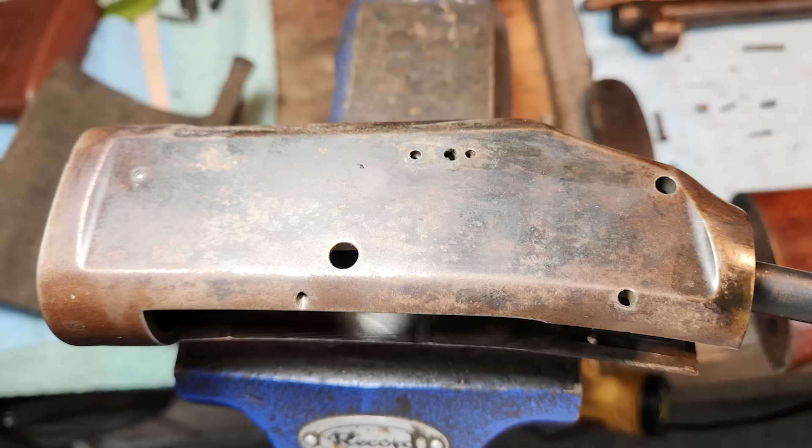This is an 1897 Winchester. Why do I have it? Because it came into a local gun shop with a Class Alpha safety problem, which is that when you closed the slide, the hammer would drop. Well, the problem with this particular gun is it's supposed to do that. So if you've got your finger on the trigger and you close this slide, that hammer's going to drop.

So now here we are. The customer honestly believes the gun's broken, so therefore I have to believe the gun's broken. Beginning gunsmiths don't get into a confirmation bias, thinking the customer must be screwed up. The customer might have to be trained, but the problem is we got to go through every single nut and bolt on this gun and make damn sure that there's nothing loose, broken, or anything that could cause the hammer to fall in a normal stroking operation.

This is a rabbit hole, so we're going to tear a 97 all the way down to zero and start over. Shall we? Let's go.

Step one, obviously, is going to make sure there's nothing in the back end here. This chamber's a little bit dirty, so we'll have to clean it. The gun's just coming all the way apart. It is a takedown gun.

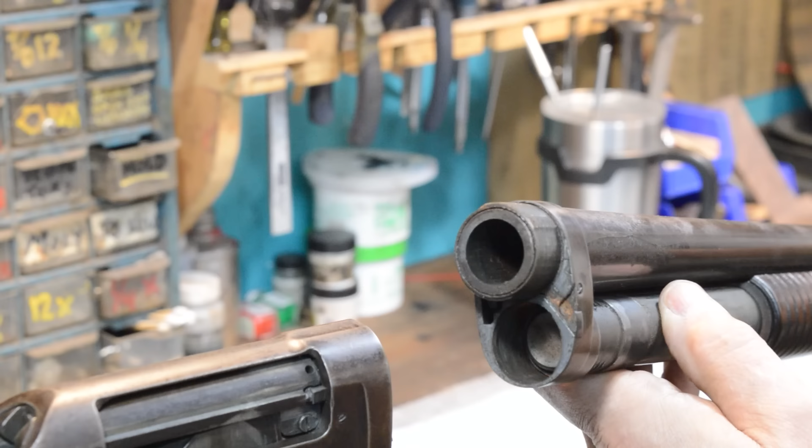Now, it is nasty. This thing is nasty, and it hadn't been apart in a long time. So we're back to our avoiding confirmation bias. We're just going to assume that if we run all of the problems down with this gun, the problem might show its ugly head.

There is a way, I believe, on this gun to slide this back, and when that slides back, this sleeve can rotate and we can take that little bit of slop out. So holding the same camera angle here, we're going to take a look up inside, and we'll see on closer inspection that there's rust up inside there. There's a lot of dirt. It's been a long time since this thing's been apart.

Okay, it's got all kinds of patina all over it, and all of this is dried oil. So I'm wondering if all of these nice features down here on a stock isn't just stock lubricant that has been flowing to the bottom of whatever gun cabinet this thing is in. So now we suspect wood integrity.

There's a lot of stuff going on here, and we're going to dive in a little bit further and take a look at what that looks like. So part of what I'm doing here is we're going to knock this thing down into smaller and smaller pieces. So there's a lot of dirt up inside this screw head. We're just going to dynamite some of this dirt out of this screw head.

Tapping all this stuff out of the holes so that we can go in and run these screws out, right? We'll have to go back in and cut these slots because this screw head is barely going down in here, but we'll get it, because when we're all done, we will have fire blued all of these screws.

Okay, good. That didn't fight us too bad, but this thing's been in the water, I'll tell you that. They're nasty, all right. The back of this is adequate, not so bad as I've ever seen it. But you can see all this oil. There's oil everywhere. Wow.

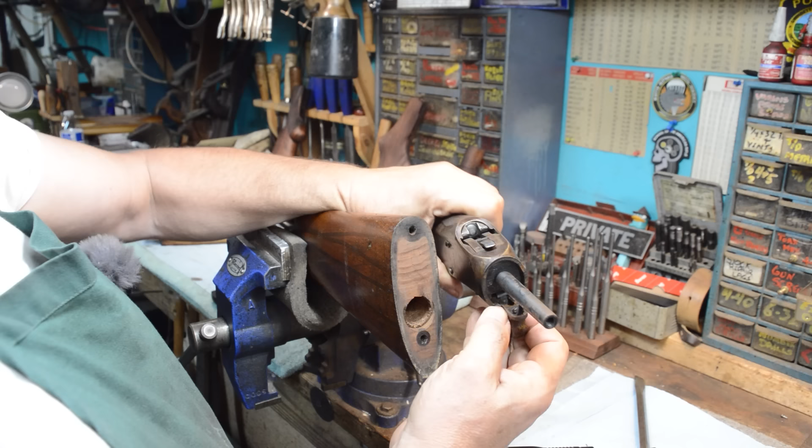We're pretty clean back here, not a lot of rust, but there is rust inside the gun. So what does rust and dried-on, impacted oil tell me, in a non-confirmation-bias environment? Until we get this thing clean and reassembled, we really don't know what we have. We don't know if something got rounded over. We don't know what we got. We'll continue to proceed on that basis.

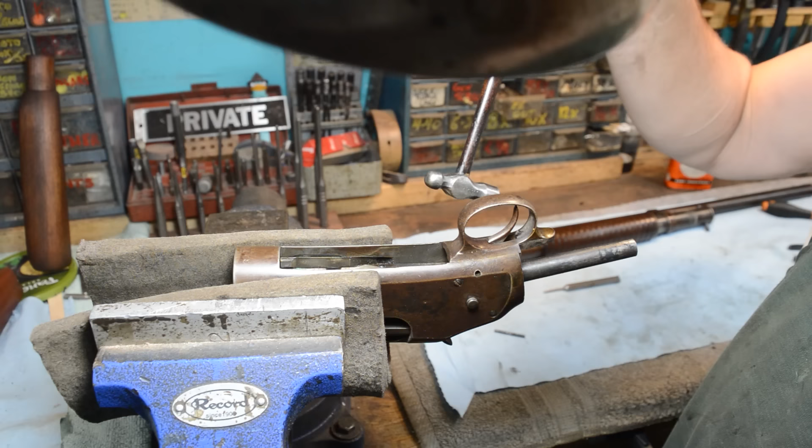That pin out, and then let's see here, we're not cocked, so I should be able to just lightly massage this to the rear. There it goes. In case you're wondering, I'm not hitting this very hard, I'm just love tapping it. In fact, if it makes anybody feel better, I'll come in with a plastic hammer if it makes them feel better.

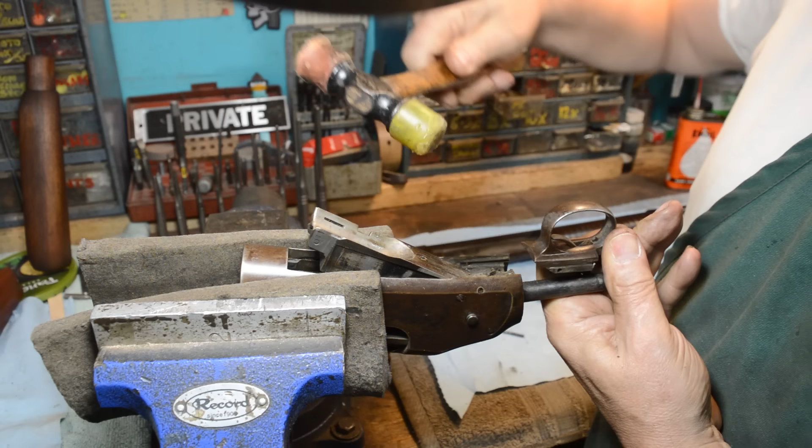Okay, so we got a little bit of dirt in there. In fact, I'm not entirely positive there's not a dead animal in there.

What you got to watch is that you don't break the end of this sear off, because that is the sear. You can see that moving, and when you press down on that, the hammer comes down. So you don't want to load that too hard, and it just slides off the top.

Contrary to popular belief, there is a locking screw right here, that when you back this locking screw off—and I'm going to take it all the way out because I got a feeling I know what the end of this head looks like.

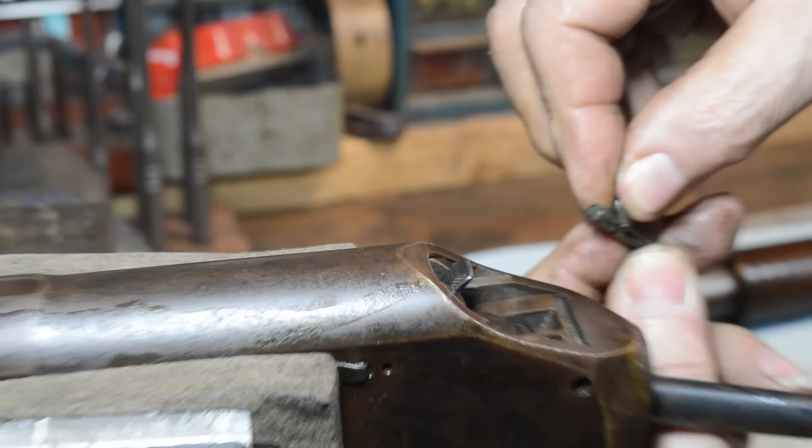See, there's a notch in that, and that's supposed to roll into the notch in the pin—I'm sorry, the retaining pin. Here, I'll show you. So we'll take this pin out, and we'll pick that pin up off the floor. Thank you, sir. And what's supposed to go on is that pin goes in, and then this screw rolls around like that, and it locks it in, you see. And that's what's supposed to happen.

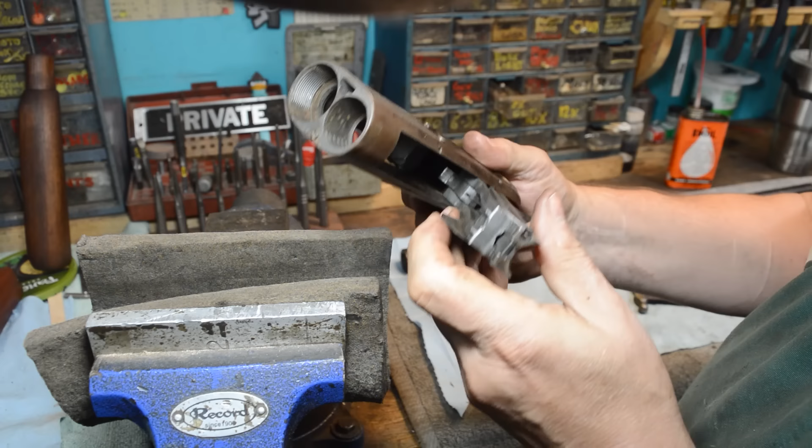And then the bottom of this should just fall out. Okay, you should be able to just get all this apart. This should come by, and that should come out. And what is holding me up? A lot of dirt. Okay, let me make sure now. There we go, I got it.

Okay, so the breech block falls out the bottom, and then the bolt, I think, is retained by a screw. We'll get back to the bolt. So we're looking at the breech block here, and this is where all the fun happens. So that's the sear spring, right? And that's the sear. So when you push up on this, that's what makes the hammer drop. It's also knocking the bolt lock—that piece right there, you can see that opening up and dropping in. So there's a lot of long parts in here with a lot of spring on them, a lot of gack.

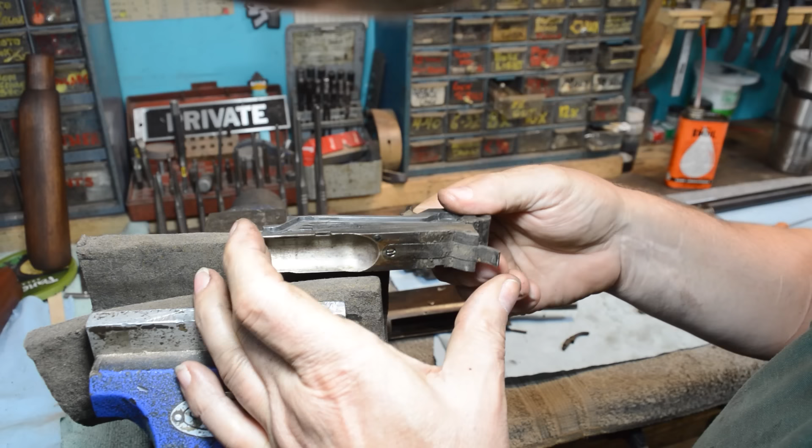Okay, let's keep going, because the mainspring is down inside here. So that piece that's flexing right there is the mainspring of the gun, and it's all in the breech block. So this is where I'm going to spend a lot of time looking, because if this thing is doing something stupid, it's doing it because of what's in here.

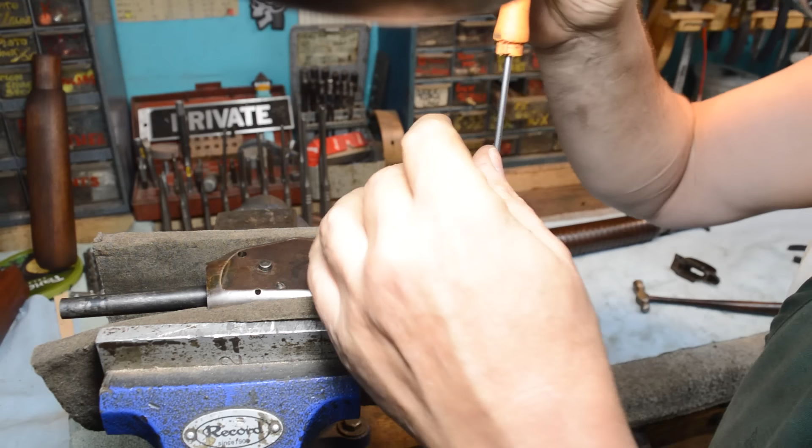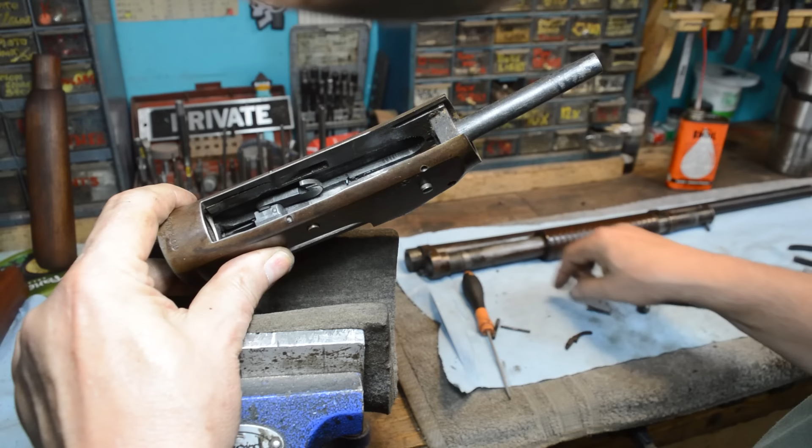Just making sure here. Once this retention screw is out, you got to get that hook out. And the hook has just enough slop in it that it'll roll up, and we should be able to get it out of here. So the hook will come out, and then the bolt should just fall out the back end, unless it's being held up by something.

Here we go, the bolt just comes out the back end. Now the way this thing locks shut, when all of this lines up and this is back at full cock, this part will come up, slide up behind that, and it locks the bolt into the gun up against this trunnion pin. So this is the abutment—that's the locking surface right there.

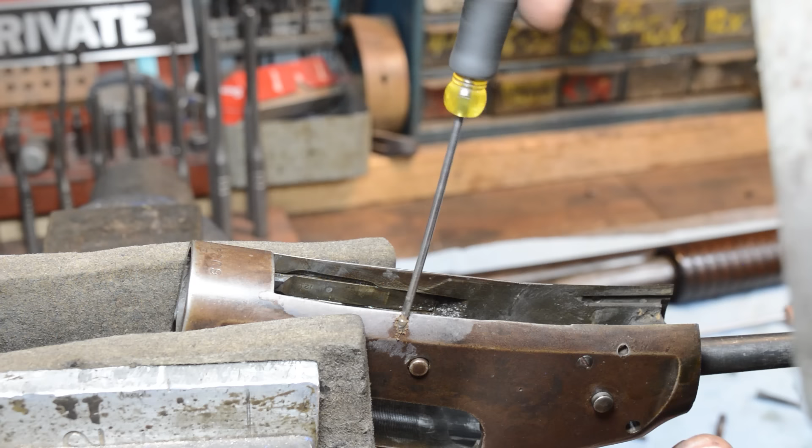There's a lot going on here. You can see all the crap coming up out of this hole. These screws have not been out of this gun in a long time.

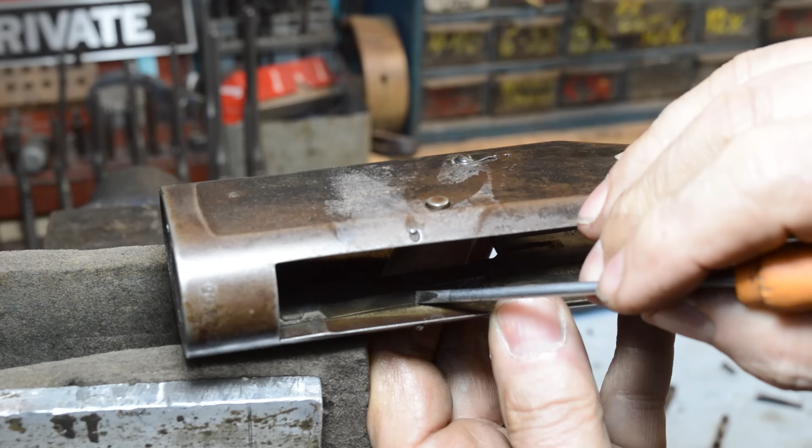Okay, so there's a spring back here behind the shell latch, so we can push in on that. And that's giving me a little bit more, because that screw goes all the way down—it goes through the shell latch and down into the bottom. So that screw's every inch of that long.

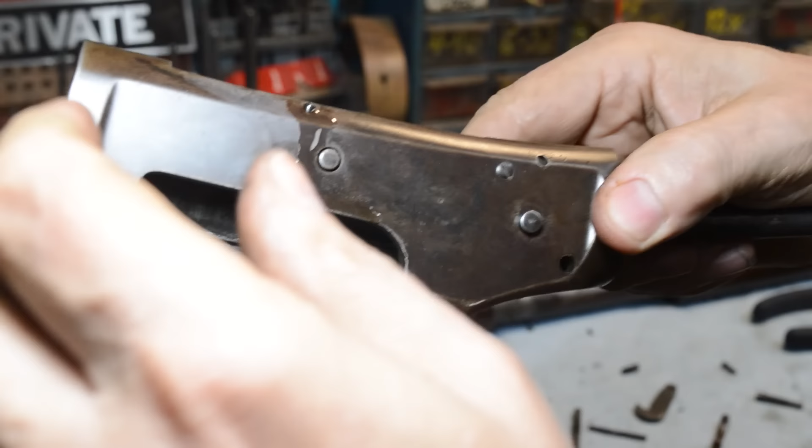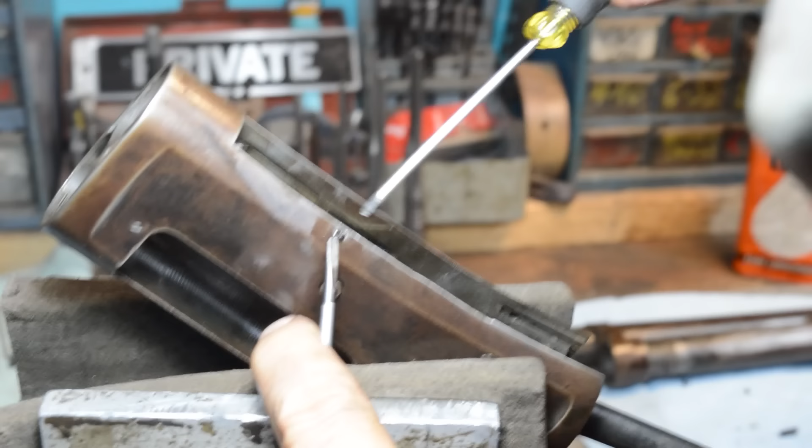So I'm going to drop a little angel piss on it here, and we're going to see if we can't persuade this to come out before we go work on the next one. Okay, we're definitely out of the threads. So I just got to try to get some lift on this and persuade this to come up while I'm rotating it.

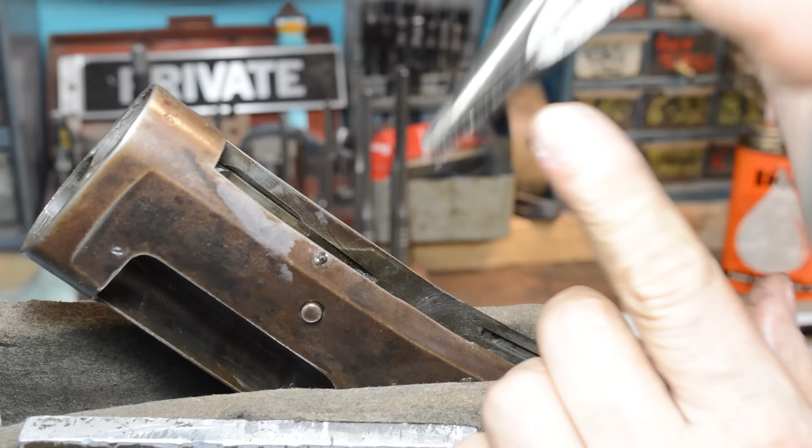There it goes, there it goes. So when I pull this out, we should hear everything cascade into the receiver. Okay, so that little bad boy - gee, we're lucky that didn't rot in there. You can see the threads, you can see everything. And once that goes down, then this shell latch comes out.

And I took them out because they're crunching. There's a lot of garbage in behind them, a lot of garbage up underneath that spring. This thing's pretty nasty.

I got to make sure I keep track of which one's what. This is the right one. So I'm going to set this over here on the bench, and I'm going to take a Sharpie marker and put an R here until we know what's what. So I've got 'right' written over on the side of the bench, you can't even see it.

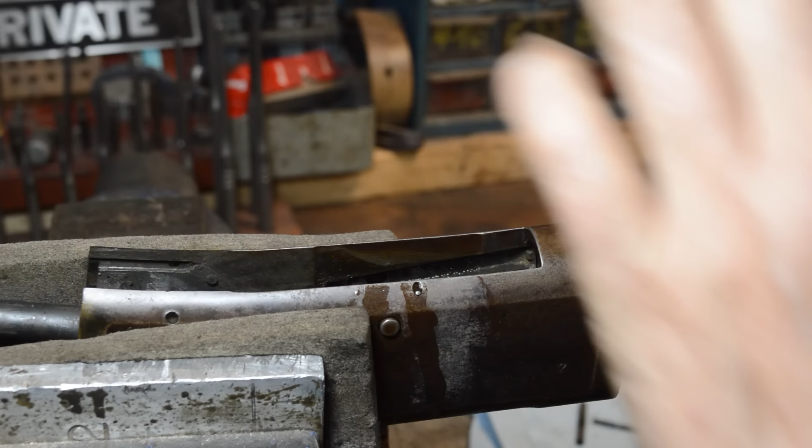Now we'll come over here and do the left side, see if we can get to that. There's a lot of gack that's just absolutely burned into this hole. Oh, I can't seem to get that oil to come out of the right spot. All right, a lot of crap that's burned into this hole. So you just walk it back and forth, and you see all the schmutz coming up.

Same deal, put a little vertical lift on this and persuade that one to come out.

It is different. We'll show you that in just a second here. The shell latches are obviously different, but the screws are different too. Same deal, we got all that garbage up underneath that. You can't feel it, but there's a crunching coming on. That's got to get done. So we'll set this over here.

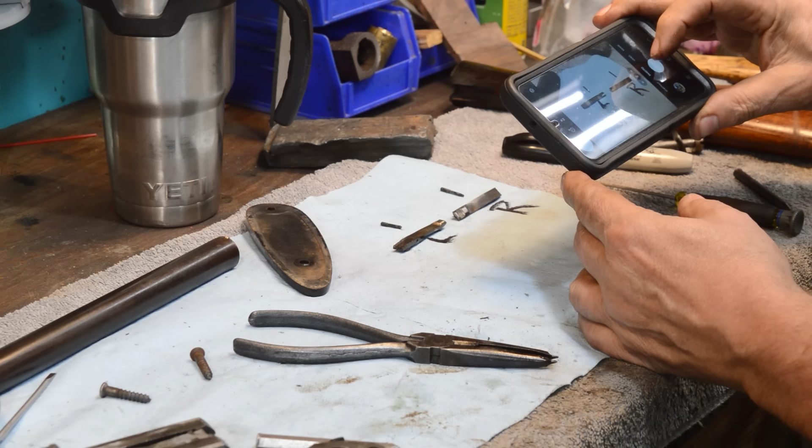This screw is shorter than this one, but this screw looks like it's been ground off flat. The left and right shell latches are not identical - the right one has this cutaway in it and the left one does not. So I've got to make sure I keep track of which one is which. Now, this is the spot right where you would fly in with your camera and take a picture, and that way you know which one's which, because now these can both be thrown in the pot with everything else and I don't have to keep them separate.

Digital photography makes us worthless and weak.

Don't be disappointed that I kept going. This thing was so nasty that it was just dynamiting the gun apart, and that's not the order it should come apart in. There were a lot of pins, springs, and screws. I got them all apart. There's only one broken piece in this gun, and it's probably going to run with it - it's the extractor on the inside wall.

There's a spring broken. There should be a tail on it filling this up. This is probably going to work - if not, I'll see if I can either make one or whatever. We got the rest of it apart, but this thing is so nasty, we're going to have to talk about it going back together again.

By serial number lookup, this is a 1914-ish... 1897, and yeah, you got to be kidding me. So I want to get this converted out. We're going to do all the conversions like we've been doing for the longest time. We'll boil it, we'll get all this patina off the side of this thing, turn this gun black, get all this rust off of places where there, well, shouldn't be rust.

And I'm 100% confident that we are the first people to take this thing apart since it was built. It's so early it even has the - you push in on the two shell latches and it'll puke all the shells out of the mag for you. So yeah, let me get this thing in a conversion pot, and when I get it all cleaned back up, get it back out on a clean towel, we'll talk about how this pig works.

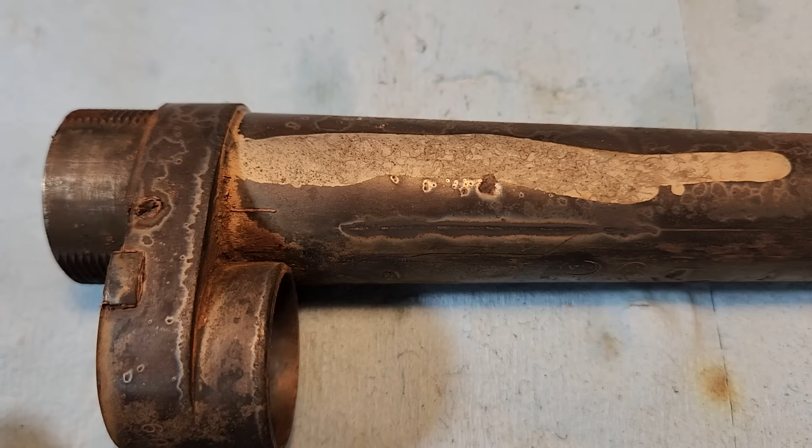When you boil all of the oil off of a barrel that has a lot of patina on it, this is what this barrel looks like with all that oil stripped off. This had been done in a little bit of lye, which is sodium hydroxide, a really, really strong soap. And when you do it, you wind up looking at what patina really is, which is a layer of oil rust. I will card this, put it back in a tank of boiling dihydrogen monoxide, card it back off again, and it will look a lot better.

But this is what everybody's arguing is valuable. I've still never really understood that. Same deal with the receiver.

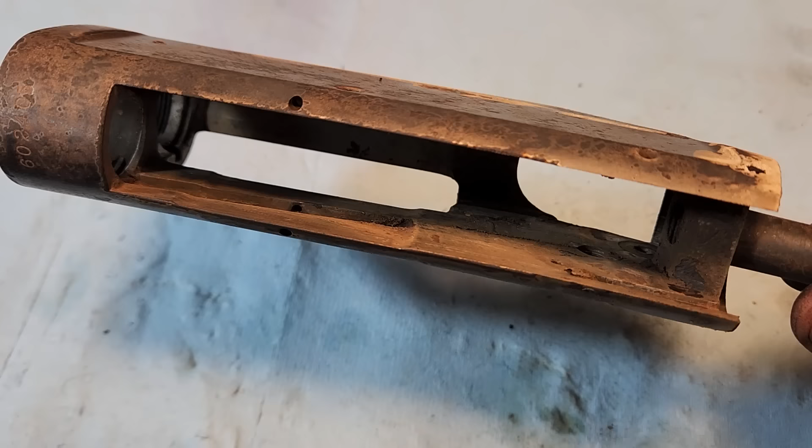We stripped all the oil off of it, and this is what's left on it. We'll give it a good boiling and take this off. But just because somebody doesn't know how to do the maintenance and chooses to call it by a fancy word,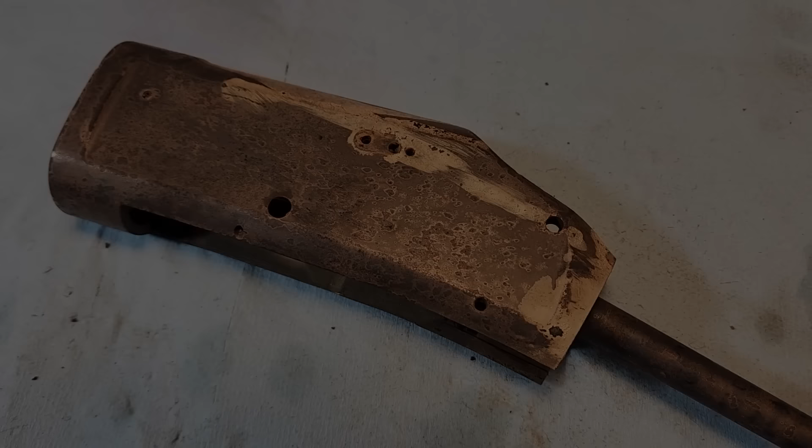Which I call patina, doesn't mean that the gun is not decaying right in front of your very eyes. So to illustrate this, here's the before and after on the receiver. We have to show it this way because when the gun's put together, you can't really see it at this level of magnification. This thing is beautiful. The gun was made in 1914 and it's gorgeous. There were no scratches on it.

No, I mean, it was lovingly cared for, just it needed to have some maintenance done. So you can see here that rust actually converts back down into the original black oxide, and you have this.

We're in the inspection phase of this, and there is a very small corner that's broken off of the half cock notch. This is the half cock. The full cock notch, however, is clean and sharp all the way across. So if the sear is clean and sharp and nobody's been in here stoning stuff to make that there trigger pull feel better, if nobody's doing that, I'm okay. So we see now that the full cock notch is clean and sharp.

We will come over to the sear. And this is the nose of the sear right here. Okay, and the nose of the sear, I put it in a vise this way to show, other than my dirty fingernails, because I've been carding guns all day. This sear is sharp. Silver line, nothing.

The sear spring, unadulterated. There was a lot of tension on it when I got to it. The sear spring is in good shape, and it had a good, loud, audible snap. The back side of the trigger, which is the part that lifts up on the sear, is undamaged.

The spring that was in the tunnel, you can see where the spring pushes on it right here where that white spot is. The spring had good snap when it was in the tunnel, and it was being held feathered up against this. Those are the only three things that keep the hammer from dropping. There is nothing else in this gun that keeps the hammer from dropping other than that notch right there.

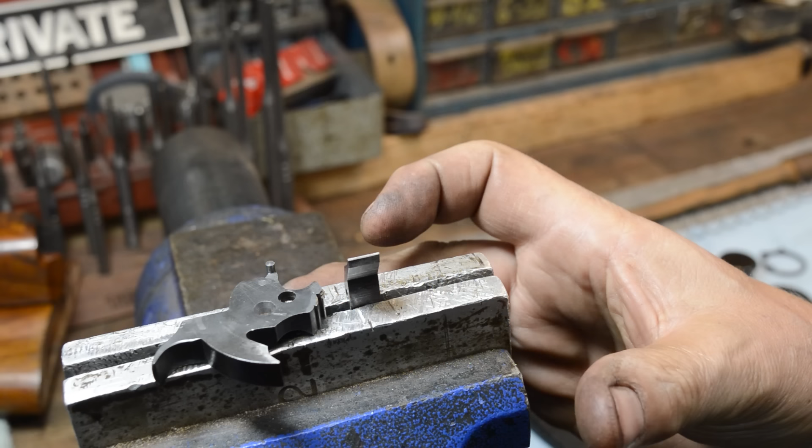This, you can get this if somebody put the gun together the wrong way, or they dropped the hammer in the wrong spot, or they were trying to thumb it down, but it didn't do any damage to the sear. So while that is a problem, it is not a problem that would cause the gun to go off, in my opinion. However, how this gun does that trick where you hold your finger back on the trigger is interesting.

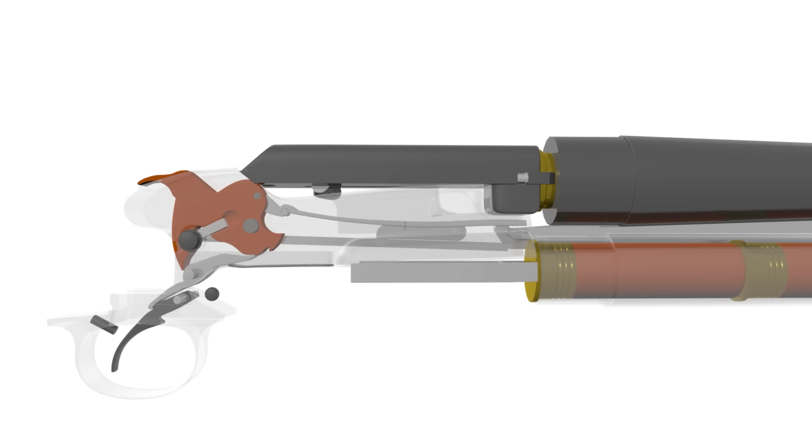As we can see here, the sear is out of position when the breech block is down. So if the trigger is not pulled when the breech block comes back up, the sear is waiting for you to pull it and discharge the round. If, however, you hold the trigger down, there is no disconnector on this gun. And when that breech block rotates to an approximation of all the way up, the hammer will fall. Hammer fall on an 1897 has nothing to do with the out of battery interlock.

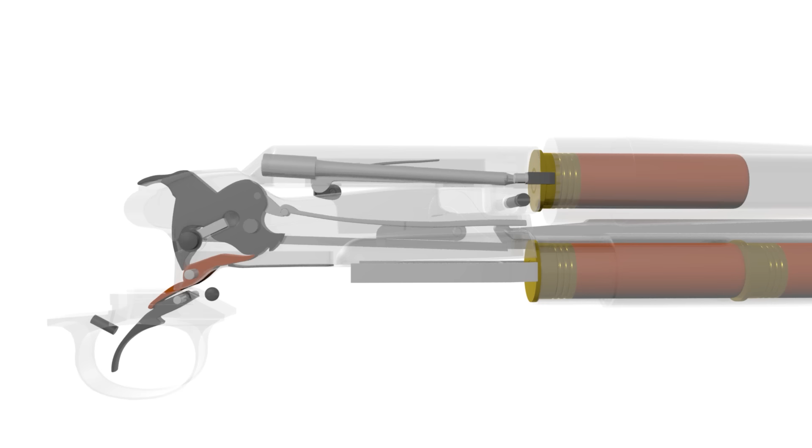And here's where this gets a little weird, because if there's any wear on this gun or any tolerance stacking, the way this gun locks shut is the bottom breech assembly rolls up into position. The notch, the tab that's sticking out of the slide handle, the action bar, slides up underneath, locks the slide to the top, and this really long, really whippy little bar locks into that and locks this whole thing shut until you do one of two things.

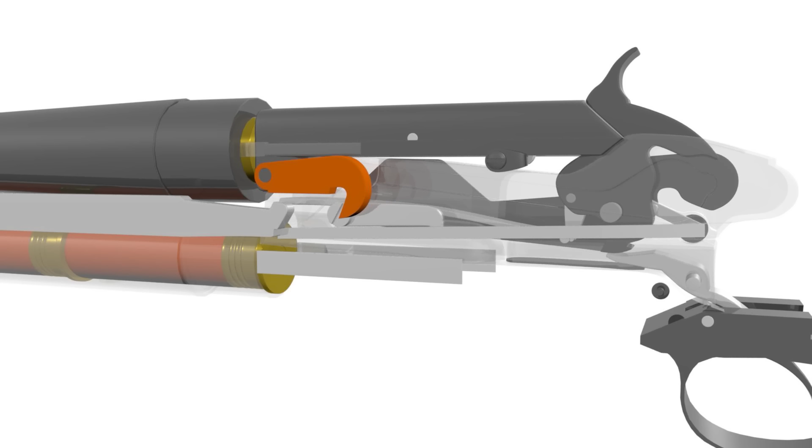Pull the trigger, and as the hammer falls, the nose of the locking bar rides out of the slot here and trips the lock when the hammer gets all the way down to the bottom, and then the slide's unlocked for you to be able to pull it back. Or you push the button on the side of the gun and you unlock it.

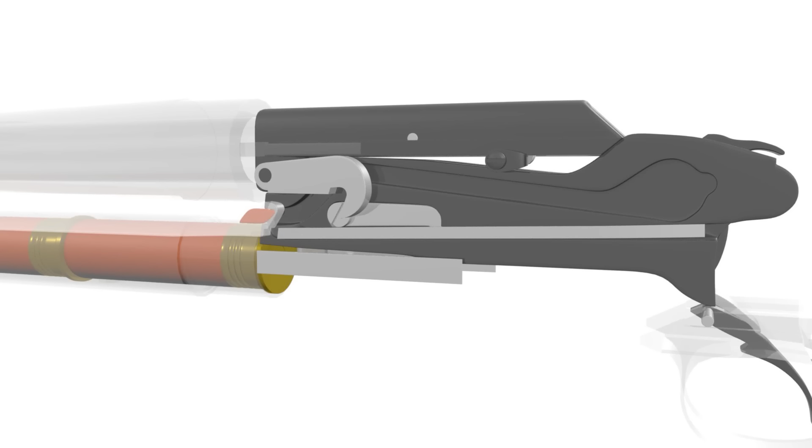So what you're hoping when you're doing a speed rock on this, or I don't know who invented the term slam fire, either way, if you run this gun with your finger down and it has not a totally large amount of wear in it, you could have this gun go off out of battery.

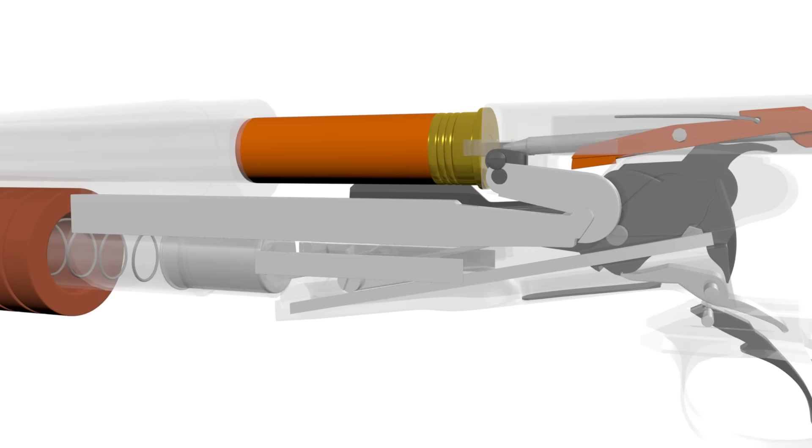Now, there is a lock on the bolt that requires the bottom part to be up and lock the bolt forward to push the lock out of the way to allow the firing pin access to the primer. Okay, I was a nuclear power guy. That's called defeating an interlock.

Tempting God, or whatever you want to call it—my advice is don't hold your finger back and try to operate this gun by pushing the slide forward. Just don't do it, because if any of this claptrap is worn, this gun can go off out of battery. Here's what happens when you try to do that.

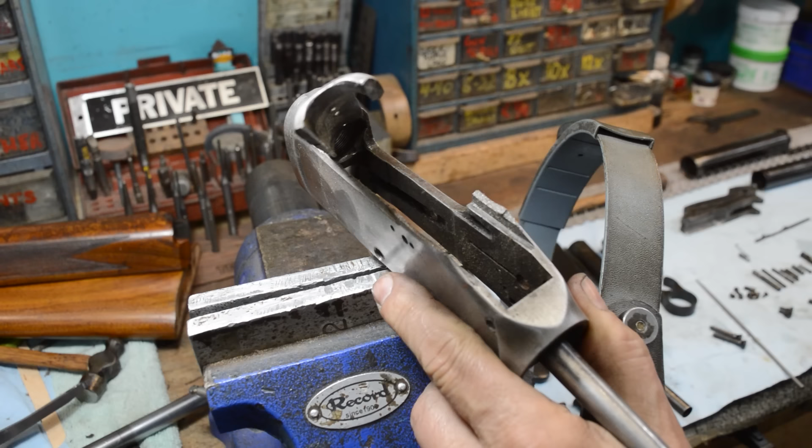Let me get this out of the way and show you something. This gun was so worn the barrel fell out of it when I tried to take it apart. It went off out of battery, so you can see the crystallization.

Focus right on the end of the screwdriver for me. You see this crystalline structure here? This is called a brittle fracture. This thing just popped without a ductile failure mode, and it picked the whole rear end of this mess up and allowed the bolt to come up out of its locking recess down here, came up, tied this whole thing up, and the gun blew up.

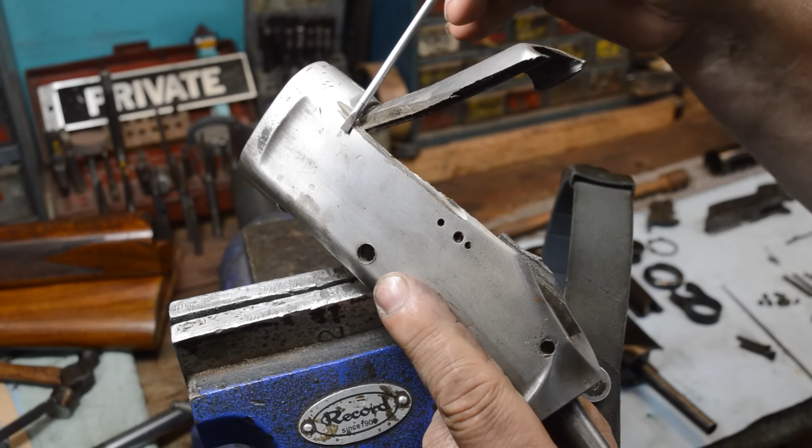When we got it, the bolt was sticking about this far out of the ass end of this thing. In order to take this gun apart, you've got to have the bolt in it, and it's got to be in battery. Everything was bent. I came in here with a grinder and cut this down here and cut this across the top so I could bend the top of this up and take the bolt out of it.

Don't be this guy. Respect this gear, man. It's getting old, and it's got a different manual of arms.

So that brings us back to our original contention about confirmation bias. I honestly believe there is nothing mechanically wrong with this gun that cannot be solved with a little bit of training of the operator. I'll make sure he gets trained, and I'm going to have him sign his name to something that says he's been trained about how this gun works, and then we'll give it back to him, not charge him anything else, because this thing is freaking beautiful.

So I've cleaned some things up and organized them back into functional groups, because I want to talk about some of this interlocking stuff, but I want to show it to you in the hardware.

While we were out, we did the full conservation we just talked about, and I steel wooled down this wood. I just steel wooled it—I didn't take the finish off. I just rubbed it out and put one coat of Danish oil over this thing, and boy, does it look sharp. I'm not worried about all these oil stains running down from last time. If the gentleman who owns this gun wants it refinished, we'll refinish it, but right now this is just what it would have looked like.

All right, we're going to put that over there. Remounted the fore end, did the same thing, put this all back together.

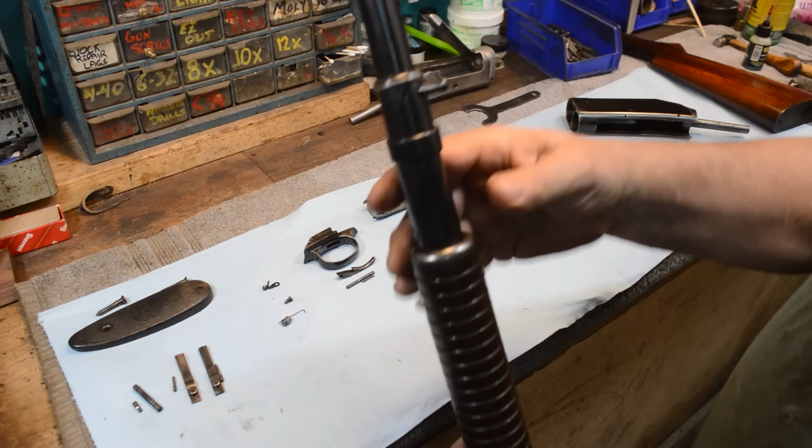When you go to put this peg back in, let me get this set up right. That peg doesn't stick out very far one way, and it sticks out a long way the other way. So make the end that sticks out the long way be the part that's down—make that be the part that's down so you get the most amount of leverage. So when this goes in, it plugs in, rotates ninety degrees, pops back up, and then it's not allowed to rotate back out.

Model 12, kind of the same way, but a lot more claptrap up here in the nose. Model 12's got things that keep this tube from rattling. There were some improvements in this design in the intervening fifteen or eighteen years.

Okay, anyway, we're there. If you ever want to take one of these things apart, yes, you need this wrench. Just order it from Midway or Brownells—a twelve gauge or twenty gauge magazine tube disassembly wrench. If you do not, you will make a mess of this. Make sure you get that.

All right, functional groups. We have the pin that holds the breech block in. We have the two shell latches, and the two pins that hold the shell latches in. These are just over on one side to get them out of here, and for some strange reason they've become magnetic. This is the magazine—what am I thinking.

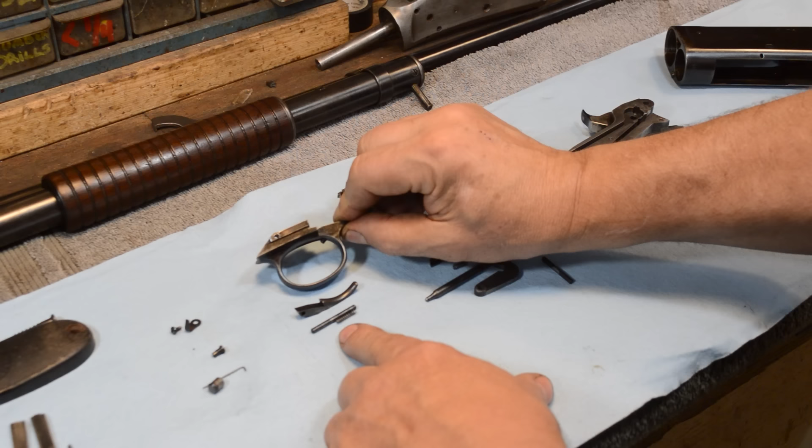We have the trigger housing, and that pin—I've heard that pin described as an over-travel setup, but I'm here to tell you that pin's there to kind of time when this whole thing goes off. We'll talk about that. Firing pin, out-of-battery interlock, action hook, breech block.

This is the mainspring housing, which I've already put the hammer back in. We're going to talk about that in just a second. And then all of the things that lock the action shut. One of the things we're going to talk about right now is why nothing in this pile has anything to do with anything in this pile.

As you can see down in the hole here, there's a mainspring. That mainspring pops out and is held in by a pin right there. So if you drive this pin, the mainspring will come out. Nothing fancy here, nothing you need to know.

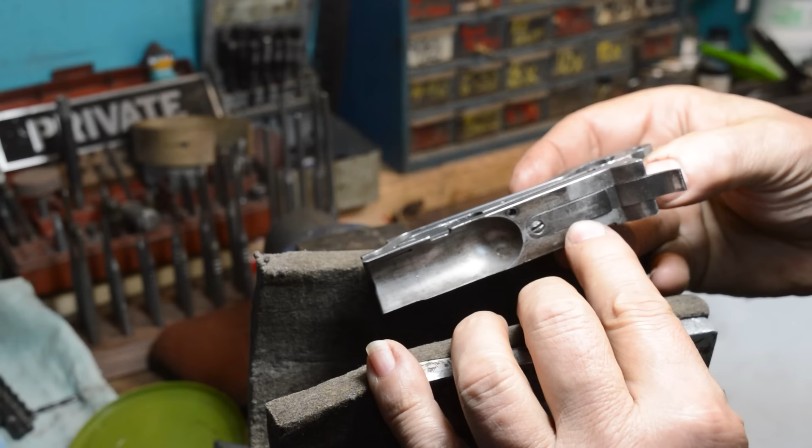But here's the big one. That's a fairly powerful sear spring, okay? And that's doing a pretty good job of pushing that down. And as you pull this back, I want you to hear something. Here, let me get my clip up there. There's the half cock notch. There's the full cock notch. We have very positive engagement. Those clicks are what are telling you that you've actually engaged all those sharp surfaces that we saw.

We're talking about confirmation bias here. And once we look at all these locking surfaces, which I've already looked at, I'm going to tell you that I've now come back to the conclusion that the gun is operating and functioning as engineered and as intended when it was built in 1914.

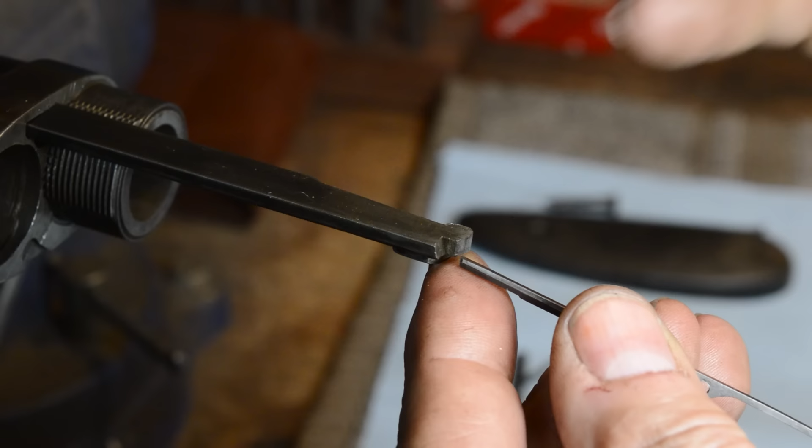There is a bevel cut here. This is not a 90-degree angle. It's beveled backwards like this. This is not a 90-degree angle, it's beveled forward. This is the piece that locks the slide shut, okay?

So when this and this are in engagement, this is how the gun is locked. And as you attempt to pull backwards on a slide, it will cause a thrust vector that rolls this up and jams this into the side of the receiver. So the harder you pull back on a slide or push on the bolt, like maybe the cartridge going off, that's something that can push on a bolt, details.

This thing will stay locked until what we're about to talk about, which is the hammer comes down. And under recoil, the gun's gonna leave and the foreend's just gonna stay here. So it will appear to come forward, which will cause this to be able to snap down underneath this, unlock the gun, and go do its thing.

And we're gonna come down now and I'll show you how all that works, but I needed to show you these bevels in close up so that you understand that there is a thrust vector when you pull backwards that's trying to kick this out and into a recess in the side of the receiver and lock the thing shut.

So the inside of this locking mechanism, this bar is going to ride in this groove right here, okay? This recess is for this spring to push out on the pivot point and cause that bar to attempt to rotate out. When it's attempting to rotate out, it's pushing on this pin through the hammer recess and out the other side where it pushes up against this button which sticks out the side of the gun, and this spring pushes this button out at all times.

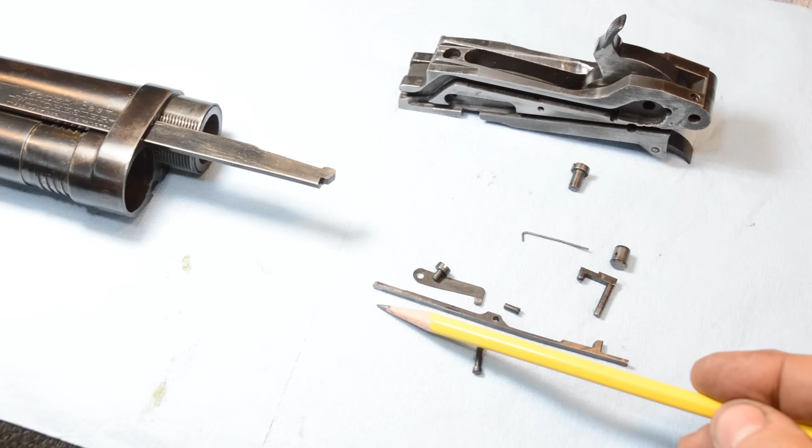So to unlock this thing, you have to take some of the tension off. The slide has to be pushed forward ever so slightly. And I'm just going to let this roll down now, but you get it. If you push in on the button, this will push through, rotate that, pull that in and take that out of the lock in the side of the receiver, and then this block is allowed to drop, which will allow the slide to come to the rear over the top of it.

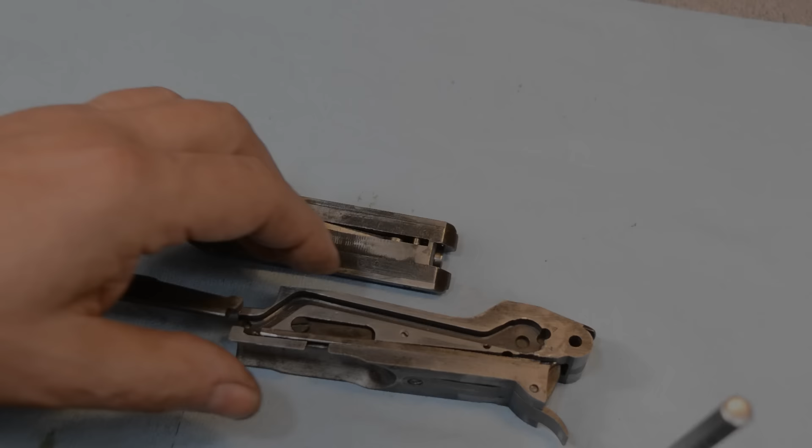So a couple of things here now that I've put this all together. If you push on this tab, you can see that that locking bar moves.

And if you don't want the locking bar to move, you can still push on the back end of this, and that's supposed to bend until that comes out of the way. So that was how the button unlocked it.

Or if the hammer drops, the hammer will unlock this. So you see that coming up right when the hammer comes down, the hammer unlocks it. Okay, I'm trying to keep my fingers out of the way here.

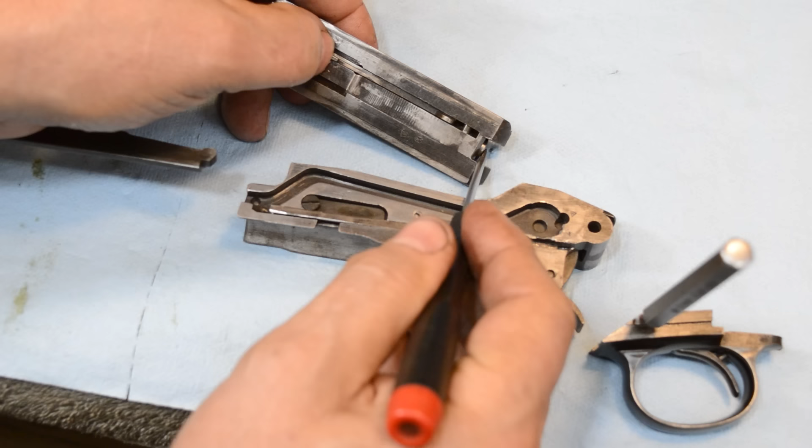All right, the bolt has the out-of-battery interlock. So if the bolt is not locked shut, the firing pin is locked out here. But if I push up, now the firing pin is free to move, you see. So that's where we're at here.

If you push up on this part, hang on a minute. There we go. So if we push up on this, it unlocks. So the way the gun locks shut is this tab here is riding in this slot.

So when the gun is open, it's down here like this, and then as this comes forward, this is drug up, around this pin, it will come up and it will lock. And as you can, whoops, can't see it through my hand right there, but you can see the tab coming down in the back.

When the gun locks shut, that tab comes down, and that last little bit of rotation is what unlocks the firing pin. We're hoping that all that happens at the same time and that all these surfaces are true. And then bolt thrust from the cartridge comes through this locking surface here, back down the locking block, and into this semicircle, just kind of like on a martini, except this is two pieces, and into the trunnion. So this is the abutment, and then the gun headspace is up against the inside of the barrel here.

Okay, so the last thing to look at is this, and I'm going to exaggerate this. We're going to use that as a pin, and we're going to say that this block rolls down, cartridge comes up on top of it, and then as this tab comes backwards, this rolls up. So what we're looking at is the arc that this sear is swinging through.

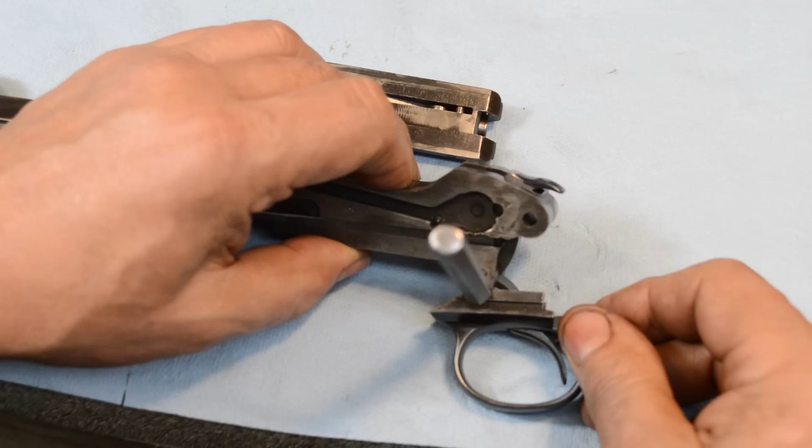So ordinarily when it swings through, if your finger is not on the trigger here, it'll come in and it'll touch right here and it'll push down on the trigger. So let me make sure I got all this right, because there's only one spot it'll do it. Right there, it'll push down on the trigger, and then if you pull backwards on the trigger, it will rotate the sear and the hammer will drop.

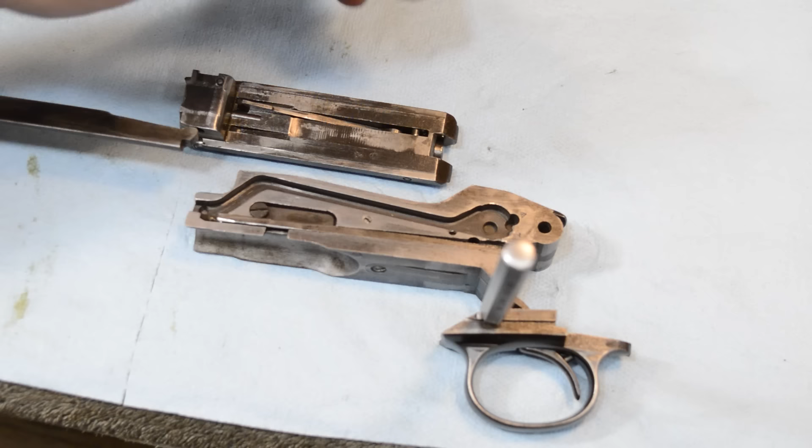If you have the trigger all the way back and this block rolls back up, it's going to drop the hammer. So what's going on for out-of-battery, or locking, has nothing to do with tripping the hammer on this gun. And think about that before you speed rock one of these things.

Okay, I'm going to finish putting the shell latches back in this gun, putting this thing back together again, and then we'll go through manual of arms at the bench, and then maybe we'll go dump a few rounds through this thing.

In broad daylight, I'd have to say this is one of the nicest, oldest 1897 Winchesters I've ever laid eyes on. I mean, this thing is gorgeous.

We've learned some things about this gun. We've learned that if you close it, we're empty here. If you close it, nothing. But if you close it with your finger on the trigger, it'll drop the hammer.

That's different than a hammer follow. A follow is where it rides the bolt down. A trip, like this does, the gun was designed to do it. But even a gun in this kind of shape, I'm not so sure I would do that to.

This one has dual magazine releases. You push these and it'll spit the round out the bottom. That's pretty cool. A little unnecessary and definitely deleted in future items here.